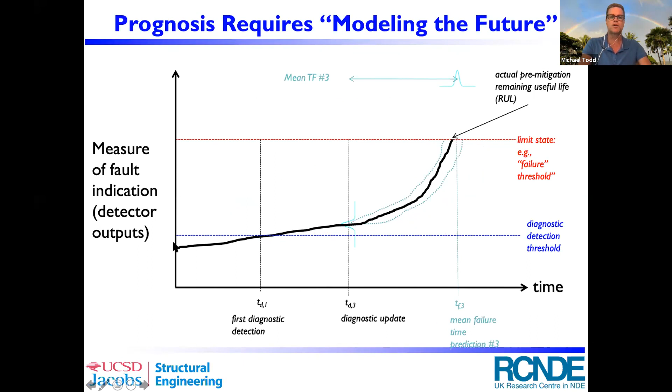If we did, there's no need to do SHM or prognosis. We have to sort of estimate it somehow. And that's where either physics or data come in, right? And that's been a big part of the discussion so far. Obviously, as engineers, we love physics when we can use it, maybe a full finite element model or something related.

But accompanying that physics knowledge must be a failure or degradation submodel. And quite frankly, it is in my opinion that the physics of actual degradation mechanisms for complex failure modes is very ill understood. We really don't have first order principle physical based models for most failure mechanisms, simply because they're too complicated, or we haven't developed the physics, or they're too non-stationary, or there are just too many phenomena that affect their evolution.

Of course, physics-based modeling, well, all forms of prognostic modeling require a future demand model on the structure. You have to know the loads, the environment, usually probabilistically given, of course. And then, of course, you always have to embed uncertainty in that evolution process, that degradation process.

Now, that's physics-based. And then there's also data-based. Now, purely data-based modeling of degradation in principle requires supervised learning. The idea is you know something failed, you've seen it at different independently observed states of degradation, and you know how your measurements correlate with the independently observed state of the structure.

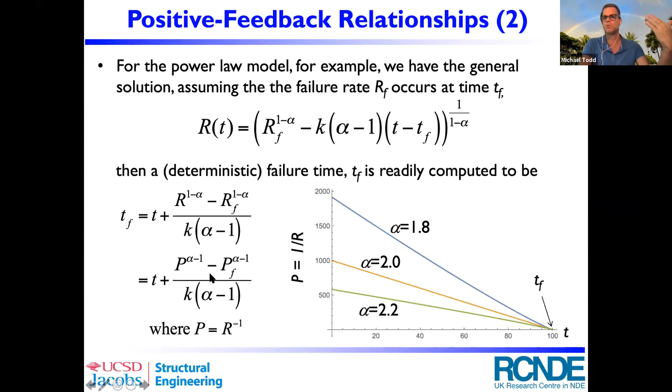So you actually have what looks like a deterministic form of when time of failure happens—a prediction based on the empirical results. You can see for different values of a parameter what that might look like. You're measuring this inverse rate; this is your data, P, and the time of failure is some function of your data scaled by some parameters of the problem plus the current time. This obviously has units of time. This is the general empirical way that this relationship works.

In fact, what people did originally in the last 10 years was observe that if the parameter alpha happens to be 2, based on knowledge, assumption, or otherwise, this actually follows a linear relationship. So what people did was just try linear regression. You can regress against this parameter K, which is the only unknown. You measure this as your feature, you know what the current time is, and you can regress on the parameters TF and K. It's basically looking for a projection of when the line crosses the horizontal axis in those charts I just showed you before.

The time of failure is predicted by the negative ratio of the regression parameters, and that's the first representation of how this problem was implemented. You might think it wouldn't work here, but it does. As data accumulate, you make a linear regression and see where your estimate crosses the horizontal axis. The failure time was here. You measure data for some period, linearly regress it, and find those regression parameters.

So as a first cut, what are we missing? We're missing all the uncertainty that inherently comes into this model. You have regression parameters, but a deterministic estimate of T sub F, your failure time, is useless as a decision maker, because especially in early life there has to be a lot of uncertainty associated with that. So the first step was to build an error estimate around that prediction.

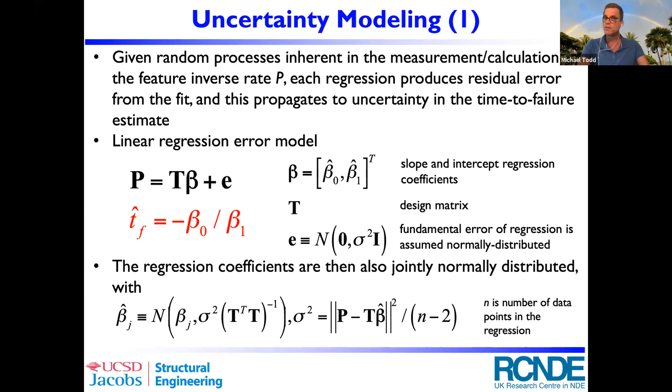It turns out that the error in a linear regression, the two parameters we're regressing, T sub F and K, the slope factor, are in fact normally distributed if you do a proper linear regression. So the time of failure becomes a ratio of two correlated Gaussian parameters. There is available, if you're willing to do the mathematics, a closed form solution for the probability density of the time of failure. It's very complicated, but it's all a function of measurable parameters in your data.

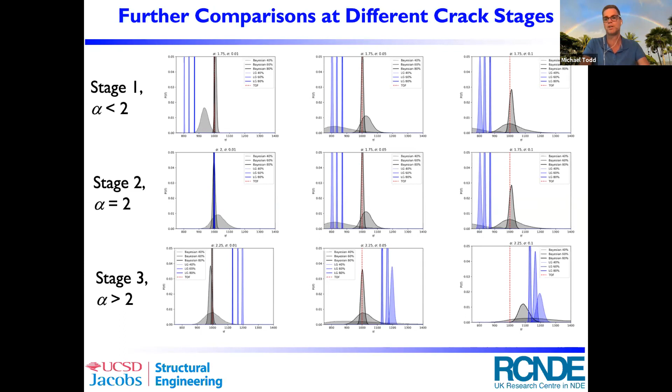Can data by itself be used only, or can physics be used? I think both of those are no at this stage. Data by itself can't be used because it really can only be done in most applications with a supervised learning mode, right? And I'm not convinced we have enough actual failure data to do it.

Because our lack of physical knowledge precludes a lot of first principles based modeling, the kind of approach I just showed, where some physical principles coupled with some data, hybridizing the approach to make predictions of the future, I think is the appropriate way to advance the field and push prognostics ahead, such that it can feed the kind of life cycle assessments that a lot of our excellent speakers have been talking about so far.

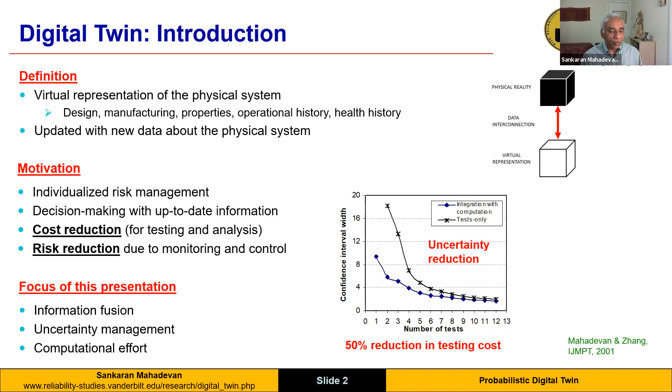The things I'm going to focus on in this presentation are, first of all, in the context of implementation, the issues of information fusion, since the information is coming from many different directions and in different formats. How do you manage the uncertainty? And then how do you handle the computational effort for realistic systems?

So I'll start with some general implementation considerations and then dive deep into the type of computations this audience would be interested in. First of all, when you are trying to build a digital twin, you want to be very clear about what is the targeted outcome you are intending to achieve, whether it's cost reduction, risk reduction, maybe improving efficiency, reliability, and so on, or resilience.

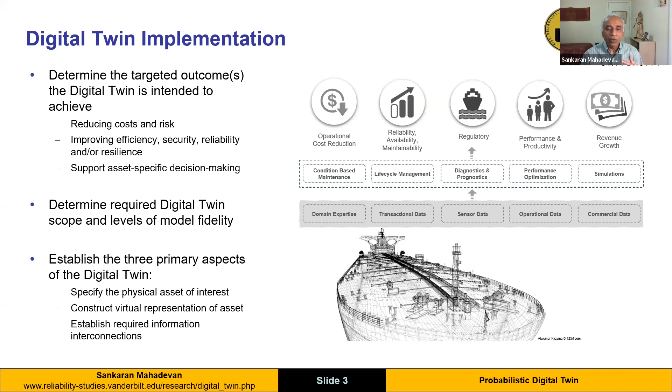So there are these three levels. As you can see, there are lots of different data models, data sources, and computational models, all of which have to be put together. So this is not a trivial task at all.

Going a little into the scope, you may not be able to construct the digital twin for the entire system in one shot, but may have to do it in a modular fashion, stage by stage. The level of fidelity you want depends on what kind of decisions you make. For low consequence decisions, perhaps you can get away with low fidelity models, but for very high consequence decisions, you may need a lot more fidelity in your digital twin. So you're balancing cost, complexity, and outcomes. If you have existing processes for data collection and modeling, how much you can leverage that would certainly help in building this digital twin.

If you look at the data side, the measurement that is coming in, you have the physical reality which you are measuring with whatever measurement techniques you have, then you have some observations, and then interpretation of that in order to feed into your models. So there are a lot of uncertainties that come in at every step of this process.

Going back to the cartoon I showed earlier, if you look at the details, the system is operating, you have measurements, and then interpretation—that's all in the physical space. That interpretation then borders into the virtual space, where you're doing model updates, condition updates, and prognosis, basically analysis, and then making decisions, which is then communicated back to the physical system as an action to be done on the system.

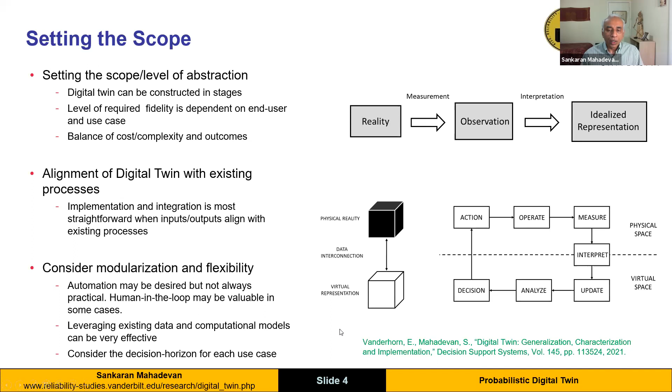So this goes on. By the way, there is a recent review paper that came out on digital twins, covering the various elements and how to consider them all in implementation.

Some challenges in implementation: first, when building digital twins for systems, communication is a big challenge. You have people from different disciplines who use the same word but probably mean very different things, and some people use buzzwords just because they like them. You'll hear the word uncertainty quantification thrown around quite a bit, but if you drill down, all they might be doing is a simple statistical mean and variance calculation from some data. So there can be confusion because of communication and use of non-standard terminology.

There is also a need for standardization. If you're bringing in data from many different sources to build your digital twin model, how the data is interchanged, what format it's available in, and interfaces matter. Right now, a lot of digital twin implementations are done in-house, so you don't know how they're doing it. Standardization is another major need, so that you can use commercial off-the-shelf systems and put them together.

Of course, organizational culture makes a big difference—different stakeholders will have different competing objectives. Technology maturity is another factor. You may have great computational models and excellent measurements, but if, for example, you're trying to use the internet to transfer data and communications and decisions, you need a very strong supporting infrastructure and technology mature enough to support this type of work.

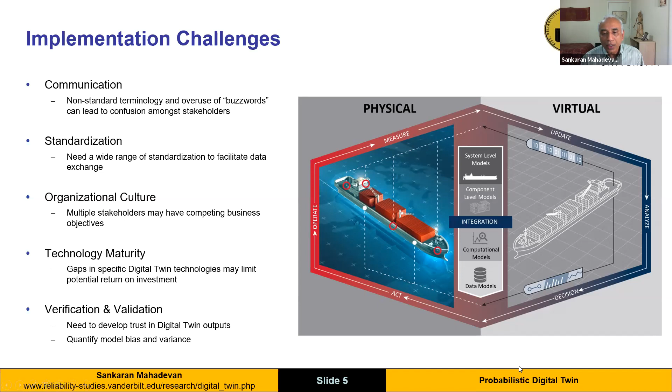So that you can quantify, just like what Mike mentioned, the model bias and variance or uncertainty in the prediction, this is an implementation that I'm going to start with for ship structures, marine vessels, for American Bureau of Shipping, ABS, which takes care of these various activities that I mentioned in the previous slide. I'll go a little deeper into this for marine applications.

The motivation was to support diagnosis and prognosis in a way that integrates all of the available data and models to reduce the overall inspection, maintenance, and repair costs for these vessels. In diagnostics, we look at anomaly and extreme event detection, and also monitor the damage accumulation in the vessel based on the operational profile. For prognostics, we look at two things: fatigue, and corrosion damage.

First, notice the architecture of the digital twin, which consists of many different data models and computational models. On the left hand side, you have sensor data, maybe on board, or some inspection. Then you have all the operational history and environmental data and the geometric models of the structure. All this is fed into databases from which the various engineering models do their calculations. You might have low fidelity or high fidelity depending on the type of decisions you make, leading to various types of decisions.

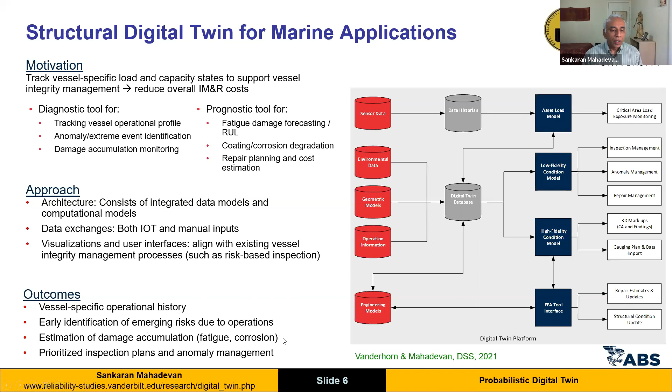This is work that is being reported in a special issue in RESS on marine vessels. Some of the elements are, first we look at this particular vessel, let's say, that went from Europe all the way to China, and you have this history of the track that it went in based on its coordinates.

Then you look at this Metocean hindcast data, so you find out what the wave conditions were during this voyage. Based on that, you also have the thickness measurements, let's say due to corrosion in the vessel at various locations. Then you feed all this data into the computational model, such as a hydrodynamics, a seakeeping model, which then translates to loads on the structure.

And then you do a full finite element analysis to get the stresses. From that, you go on to calculate fatigue damage accumulation, and then prognosis, and then support these various types of outcomes in terms of damage accumulation and remaining useful life and so on.

And then support decisions for risk management and also availability of the ship, let's say for the next voyage. Does it need to be repaired? How long will it take before it can be put in service again, and things like that? Or how much can I extend its life for future missions?

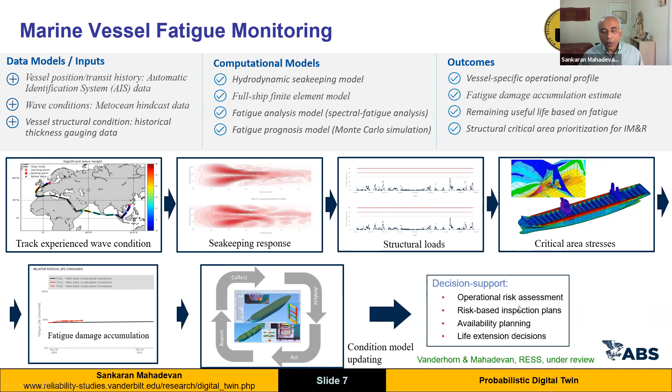So then I want to drill further, saying, well, how about the decision making also being part of this digital twin work, where we have been using aerospace systems to demonstrate these ideas, where you have, let's say, aircraft or rotorcraft flying these missions from which you collect all the data, and then you have the damage diagnosis and then damage prognosis, and then based on that, you optimize the next mission and so on.

Some of the details, the computational elements, are probably very familiar to many of you. You start with multiphysics models of the aircraft or rotorcraft. You do sensitivity analysis and surrogate modeling because you want to have the uncertainty quantification or diagnosis prognosis techniques, which will necessarily involve many samples, like using Monte Carlo samples. So you will need some kind of surrogate model to accomplish that in a reasonable amount of time.

Then you fuse the information using Bayesian estimation and then quantify the uncertainty in diagnosis. Similarly, in the prognosis, you use the forward problem and you quantify the uncertainty there, also coming from the models that have their own uncertainty. So all that has to be accounted for.

And then you do this optimization. This optimization now could be of various types. So the decision horizon becomes very important.

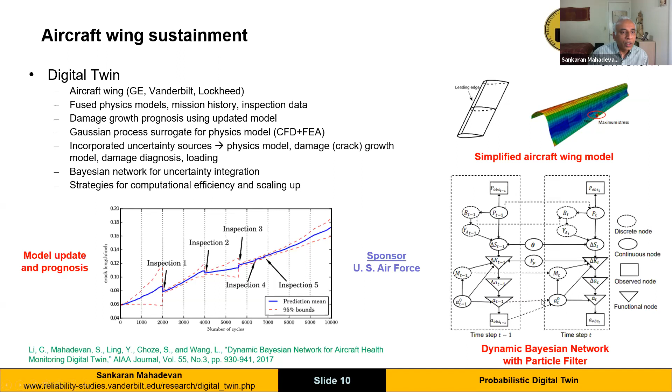I'll get a little more detail into this dynamic Bayesian network in a minute. Another example, which we are actually doing now for the US Army, is for rotorcraft or helicopters.

In this case, we do two things. One is mission planning, and then later on I'll talk about maneuvers within a mission. So in this case, we were looking at optimizing the flight parameters, let's say horizontal and vertical velocities at each flight phase, in order to complete a mission and minimize the stress on this component.

This component is the mast on which all the blades are mounted, the rotor blades. The loads are coming from a computational structural and fluid dynamics model, and then a FEM model does the stress and strain analysis. We were looking at a particular type of degradation where there might be reduction in effective cross-sectional area due to damage. So supporting diagnosis, prognosis, which includes model update, and then optimizing the mission profile.

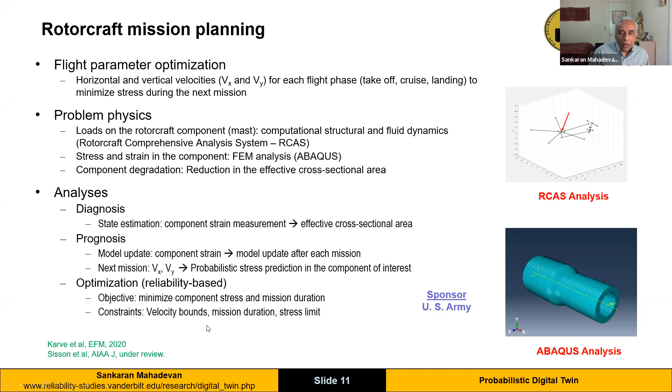In the case of within a mission, this is the thing that we are doing right now, what we call damage adaptive maneuvers. So suppose you have a rotorcraft in a battlefield that has been hit by some enemy fire, and it has some damage, and you want to be able to complete your mission and return to the base safely. So how do you adjust your maneuvers in such a way that you complete your mission but without growing the damage further, which means what?

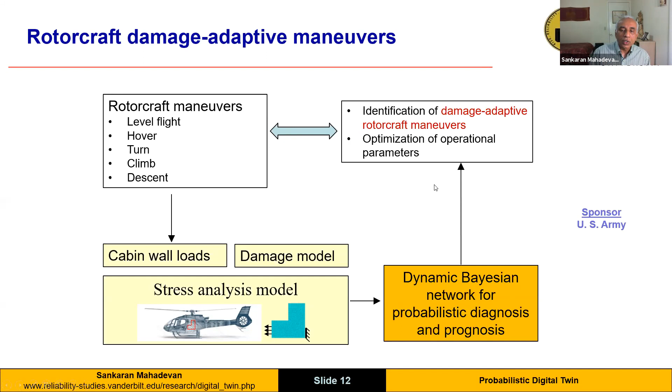You just adjust your maneuver so that the load is redistributed so that the damaged area does not get affected further. You can see the data, the sensors we were looking at this fuselage section, and the sensors are mounted here, which convey the information about the damage. Then using the models, integrate them through the Bayesian network to do diagnosis and prognosis, and then optimize your operational maneuvers.

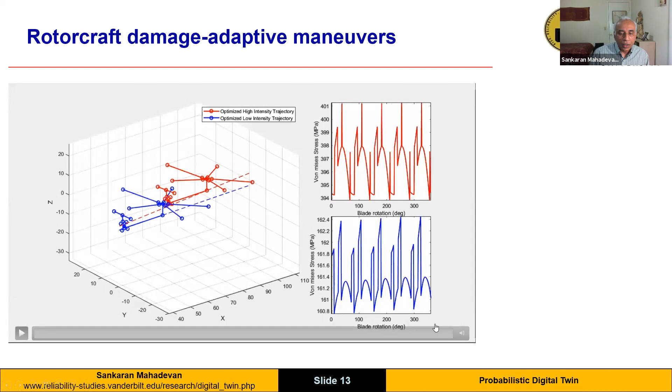For example, if you have this, these are two trajectories - there is a red one and there is a blue one of the helicopter. As it flies two different trajectories, you have different load profiles, which of course affect the stresses on the various structural components.

So what you want to do is, let's say you want to have a trajectory that will safely complete the mission. So let's say you have a mountain here, and so you have to fly around the mountain. So you have some specified trajectory. What we do is first we learn what kind of maneuvers are needed, the various types of maneuvers needed to follow that trajectory. This we do using reinforcement learning.

And then using those maneuvers, we can calculate the loads on the aircraft using this RCAS CFD and FEA model. Based on the FEA model, we can get the stress and damage growth, and then we do it in iterative fashion to see what is the most optimum trajectory that will minimize the damage growth. So this is the damage adaptive maneuver work.

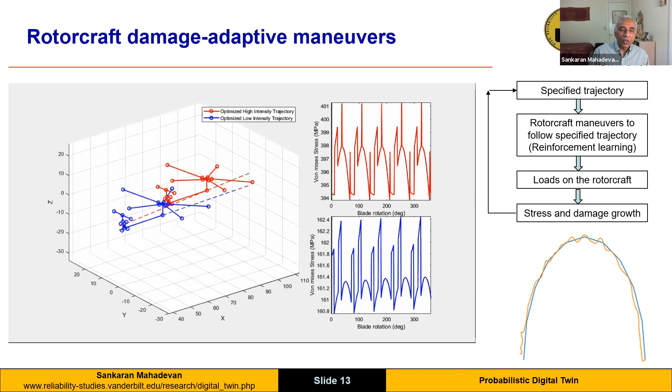So the digital twin is now supporting, and imagine this decision has to be done very, very fast. So the three examples I showed you have three different decision horizons. Now let me get into the computational elements. Many of you might be already familiar with quite a few of these.

First of all, there is information fusion, and this is being done using a dynamic Bayesian network. Of course, there is sampling of the uncertainty, either for prognosis or for model updating and parameter estimation and so on, using MCMC or particle filter type techniques.

The physics model, the full fidelity physics model might be very time consuming to do. So quite often we would resort to reduced order modeling or multi-fidelity models to support our work. In many cases, even that might be too expensive, so we would end up doing surrogate models.

Either surrogate models that are purely based on the physics model, and many of us have done for many years these types of models - polynomial chaos, Kriging, Gaussian process, radial basis functions type models. Or you might have data-rich environments too, which we are doing a couple of projects right now, where you are able to build a purely data-driven model such as ARMA models or support vector machines, deep neural networks, or recurrent neural net for time series problems, LSTM type models.

And in some cases, similar to what Mike said, you might have physics-informed machine learning or hybrid models are possible. In surrogate modeling, there is also the question of adaptively selecting the data to train your model, what is referred to as active learning.

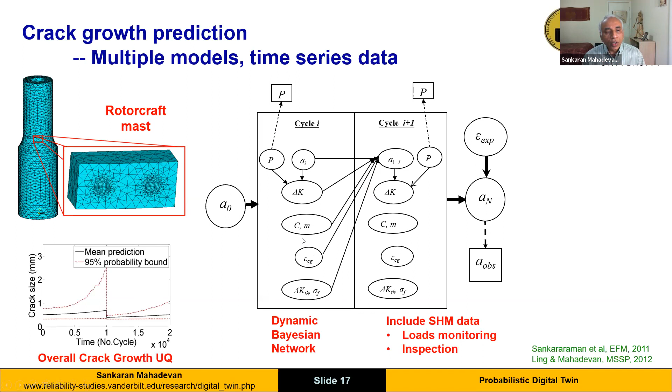Coming back to this crack growth prediction of this rotorcraft mast, you have the loads being monitored, and also the inspection is telling you what the damage condition is, with which you are doing the prognosis. Now, even this Bayesian network, first of all, has multiple layers, many different models coming into play. There is a finite element model here, there is the crack growth Paris law parameters here, and so on. So you have situations where you have a multi-layer Bayesian network.

So one of the things we did to really make the computation scale up to high dimensional problems is, first of all, convert this multi-layer Bayesian network to a two-layer Bayesian network. How do we do that?

So you have so many layers. Some of them are, of course, deterministic, which are just intermediate variables. You can collapse them into something like this, but it's still a three-layer network. So when we introduce an auxiliary variable, it brings it down to a two-layer network.

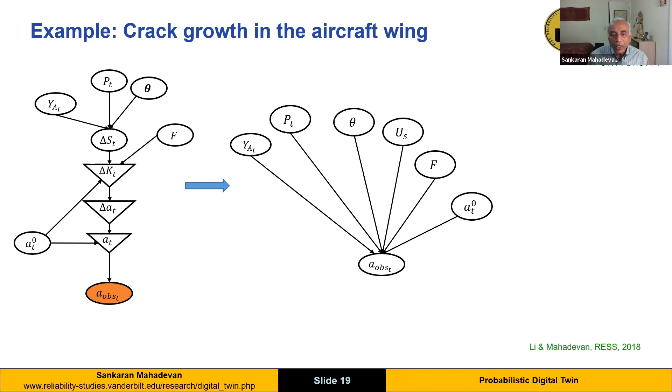Once I have this two-layer network, what I can do is build an unscented transform to connect the upper layer to the quantity of interest, and then use an unscented Kalman filter, which accounts for the nonlinearities. But of course, it's still applicable to Gaussian. So if you have non-normals, you have to use equivalent normal transforms before you use this.

But this is something - you can have a very fast and approximate inference on these multi-layered Bayesian networks, which is something you will encounter in common digital twins.

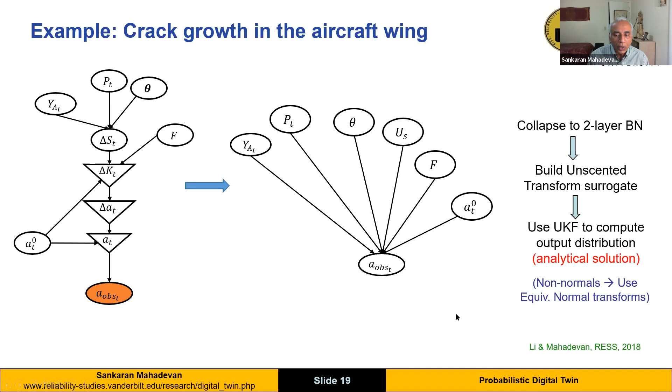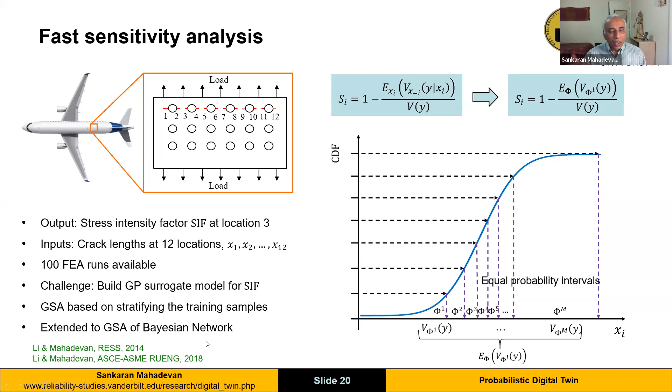And we extended this idea to also do the same thing for a Bayesian network as opposed to a deterministic model. In this case, we are also able to include not only aleatory but also epistemic uncertainty sources. So when we did all this, for the same problem that I was showing you for the aircraft wing - this is of course an academic example we did at the university, and then GE implemented this for the actual F-15 aircraft wing. So you have here this multi-layer network.

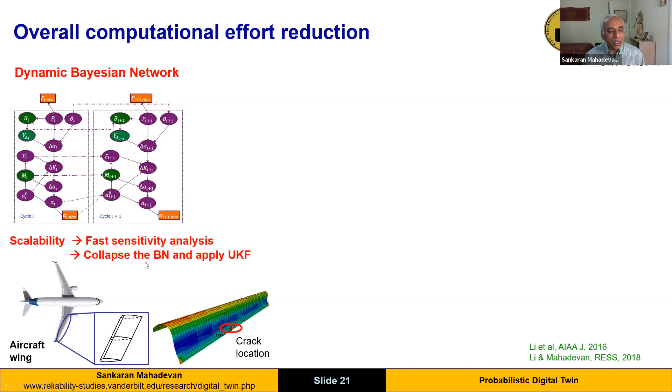So we do the fast sensitivity analysis and then collapse the BN into a two-layer network and then apply unscented Kalman filter. First, the sensitivity analysis removed a lot of the other variables that were not dominant, so only a few were left. And then the collapsing into a two-layer network and applying the UKF.

So you can see here, something that even with surrogate models took us 10 hours to do to begin with - this sensitivity analysis, and then the collapsing and doing unscented Kalman filter - brought it all the way down to 1 second from 10 hours. So now we are talking scalability.

So when GE and Lockheed implemented this for the F-15 aircraft wing with a very high, million degrees of freedom, very detailed finite element model, and information fusion, and doing this type of prognosis, they accomplished that within 20 minutes. The commander wanted us to do it in 30 minutes, and we got it done in 20 minutes. So that's what I'm saying, the power of these various computational algorithms to speed up.

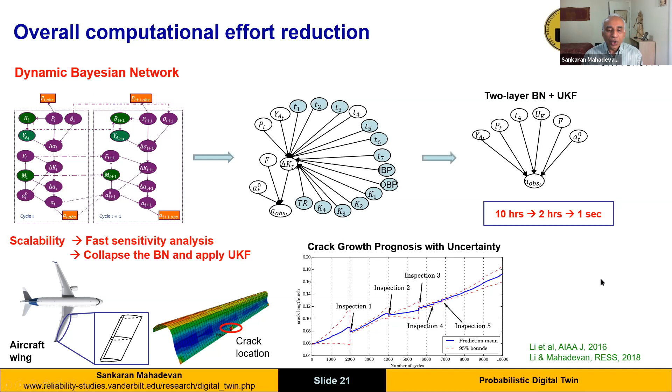And yet, of course, we had to validate that with the actual data to show that the models did not have a large bias.

So we are now applying this thing also to smart manufacturing. This is work funded by NIST. I see that I have overshot my time, so I'll just quickly show this example.

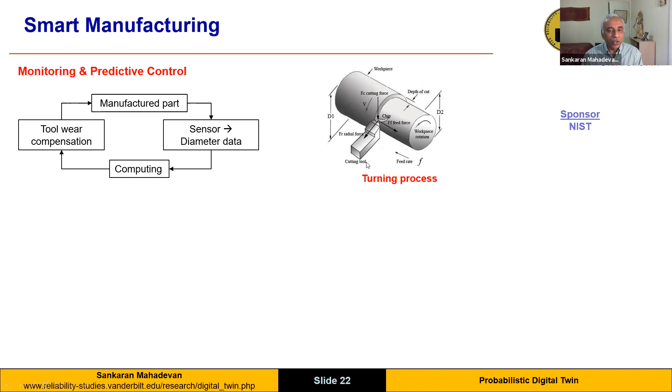In this case, the turning process, the tool is wearing, and so we want to monitor that, and then advance the tool so as to keep the diameter at the required length. So again, we build a dynamic Bayesian network to accomplish this, and without the control, the diameter would have continued to grow. This is what was specified to us by NIST, that we need to have it within these bounds, and by this monitoring continuously and doing the prognosis and control, we were able to achieve a very, very high accuracy in the diameter.

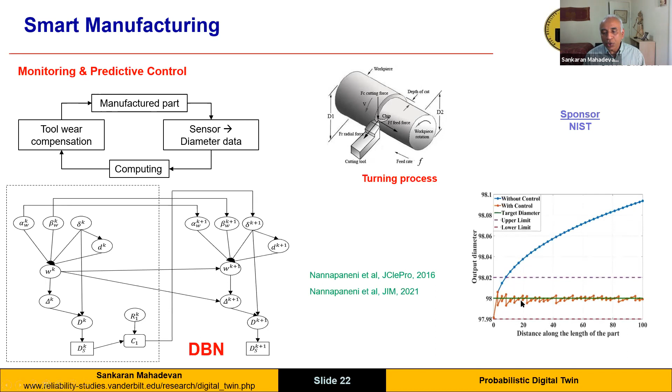And now we are applying this to additive manufacturing, again also sponsored by NIST, where you have the infrared thermal camera and the profilometer.

They are measuring the temperature profile and the surface roughness. First we do process parameter design, similar to what we did in terms of mission planning earlier. Now we're doing the process optimization that will minimize the surface roughness and porosity and so on.

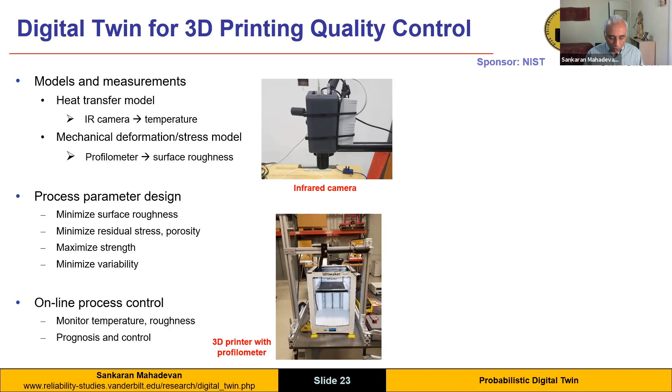Then we also do process control during the process, monitoring it, and therefore doing diagnosis and prognosis, and then adjusting the process parameters to make sure that the quality of the product is what we want.

In doing so, you have many different models, especially in the case of metal additive manufacturing, that need to be integrated. And the data, this is also a data-rich environment where you have a thermal camera getting the entire thermal profile. So we have built various kinds of machine learning models and hybrid models for these different scenarios to achieve this digital twin for manufacturing process control.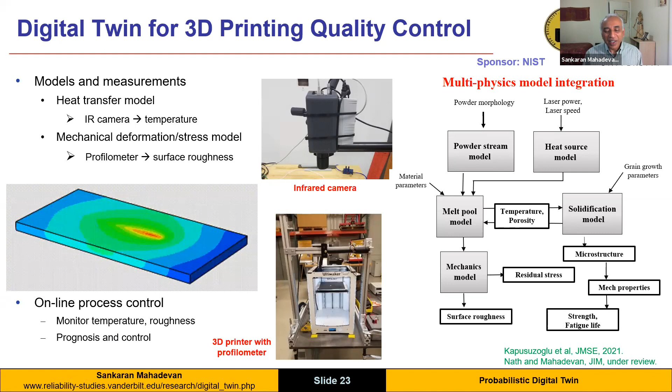In fact, the original digital twin, the very first 2003 paper by Michael Grieves, was actually for manufacturing process control. So we've kind of come back full circle on this, doing it for additive manufacturing.

The dynamic Bayesian network approach that we've adopted, with all the efficiency strategies, facilitates both the forward problem of uncertainty in prognosis and uncertainty aggregation, and also the inverse problem of decision making. Two levels: one is uncertainty reduction, and the other is actual decisions with the digital twin, such as sustainment, mission planning, or control during the mission or process, and so on.

We are currently expanding this idea of digital twin to two very large scale projects. So far it's all about individual components and parts within systems, but now we are doing one for the power grid system in the US, where you monitor power grid fluctuations, demand and supply fluctuations on a minute-by-minute basis, and you are making decisions.

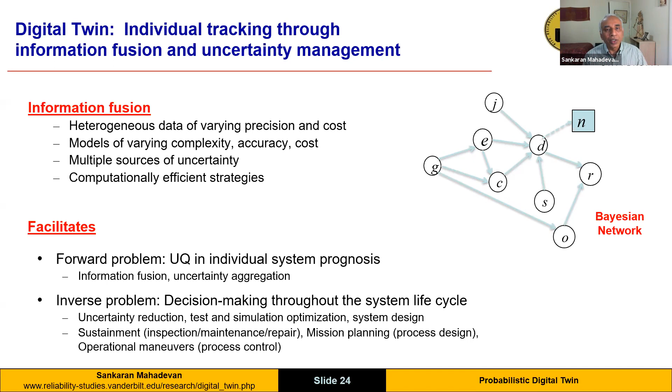Again, apologies for going over the time limit. At least you gave us a warning, but it was actually very interesting. Maybe then to thank you both for the great presentations.

I wonder if we could start with a question for Mike. In what you showed, there is this value of empirical models, which I agree is quite significant. But I'm wondering about processes that extend to higher dimensions. For example, maybe you have multiple components and therefore multiple elements that have to follow some sort of law, and these structures of multiple components are observed with a monitoring system. Really, the way you connect monitoring data with these processes is through a model that couples everything together. What happens in that case? Is the complexity impossible to tackle, or are there ways around this?

No, I think you're describing one level more sophisticated in this empirical hierarchy in terms of what architectures can be applied. And you're absolutely right, these kinds, I still think it's going to be somewhat one of these sort of hybrid empirical statistical models based on what data you have collected in the past and some prior physics or other knowledge, because I don't think the physics of a full forward developed problem is going to be there—the more complex you get, the exponential increase in complexity.